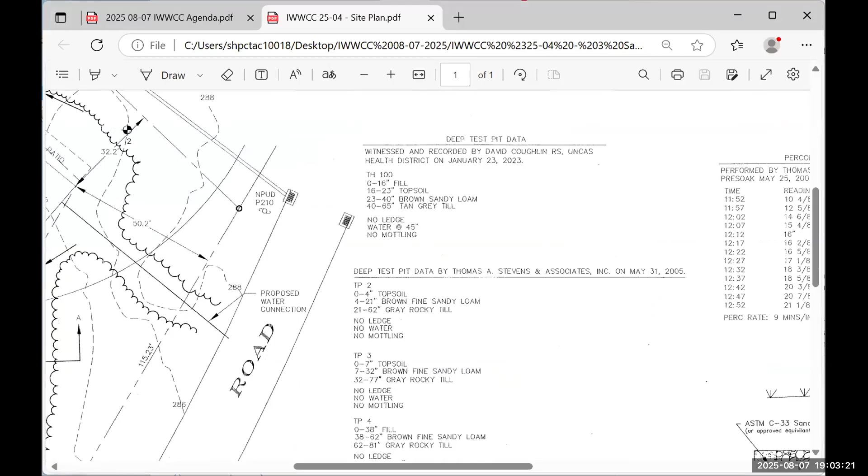Can you hear me now? Yes. Okay, sorry about that. I'm not real familiar with this, I'm just sitting in on the meeting in case there were any questions. I believe we have the site plan that we created meets all the requirements as far as the city and wetlands should be concerned, I hope. That was really it, I'm just sitting here in case there's anything anybody needs to hear.

How close are we? We're within 100 feet. So this line here is the Upland Review line. It covers the whole house, the driveway, most of the septic. Then this is the conservation area, restricted area. I don't know if you remember a few years ago, we had the house across the street, 2 Sabrina's Court, same kind of situation. They had that pond next to it and the wetlands are back here. So this is an approved lot from the subdivision, but it's been so long, they've got to come back for a new wetlands permit.

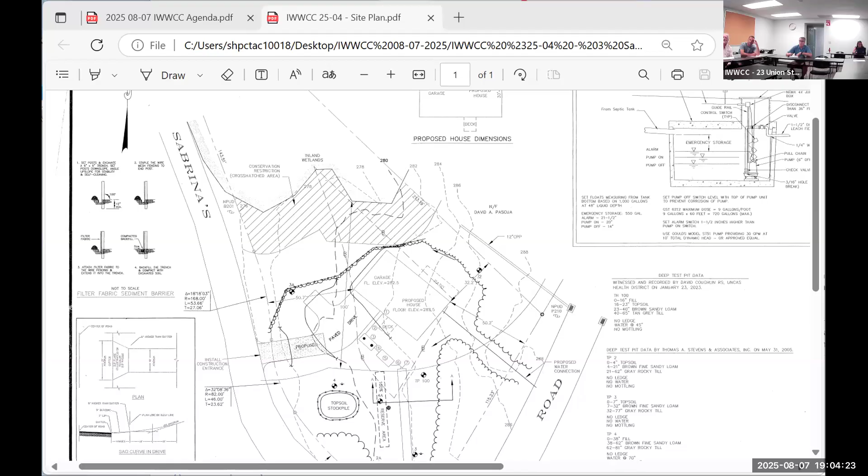Any comments from the city engineer? Minimal comments, I can go through that if you'd like. It talks about utility connections, putting in drains. It asked the E&S control, and this is in my memo too, be updated to reflect the newest guidelines, and to add wings to the silt fencing.

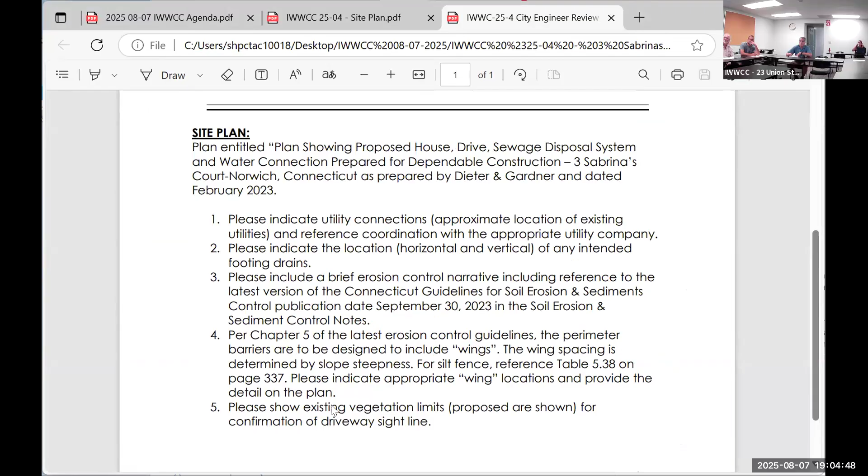And then I can go through my memo real quick. As I mentioned before, it was approved in '06. They do have their material stockpile location outside of the upland area. There's no anticipated long-term impacts to the wetlands. Home and the septic tank system are in the upland review.

Just note that after the presentation, you need to determine if a public hearing is necessary, and that would be for next month on September 4th. The only comments I got back were from the city engineer. I just asked that they be addressed on the revised plan set after tonight.

It's located in an area of moderate sensitivity for archaeological resources, so if they find anything on site, we just have a note in my memo here to contact city staff. I spoke to the city engineer about a bond, an E&S bond. It's $1,800.

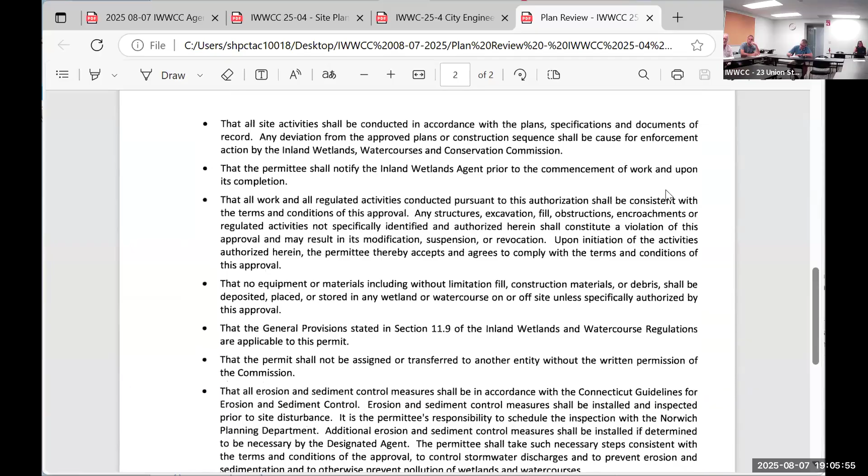I just asked to waive the reading of all my bullet points here, but they be included in any motion that may be made for approval. And as usual on the record, if you just state that the proposed E&S controls are sufficient to protect wetlands, if someone so chooses.

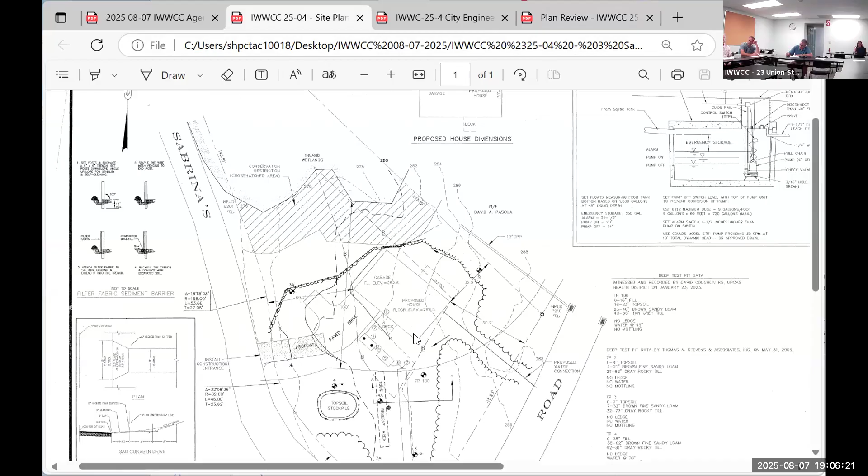And were there any other points that you want? Not really, it's just a typical house construction. They've got silt fencing, clearing limits. We're pretty good with it, really.

Any questions of staff? It's just hard to see. So the septic's in the front, right? Okay, there it is. Yep. And so the well would be, must be to the back of that. Excuse me, there's no well, it's gonna be city water. City water is gonna come in off Plain Hill Road. The water line goes right here, as far as that.

Okay, Dan, have you been on site? Yes. There's a lot of Russian olive in that conservation area. I know it has nothing to do with this permit, but I just wonder if you should have any concern with that at all.

From a wetland standpoint, no, but from a conservation standpoint -- well, that's part of your charge too, it is, part of our charge. So from a wetland standpoint, everything seems to be recognized. I personally wouldn't mind if during this construction, monitored by staff, some of the Russian olive and invasives were cleaned out of that conservation area. It's a sign of good faith, it would help the owners eventually.

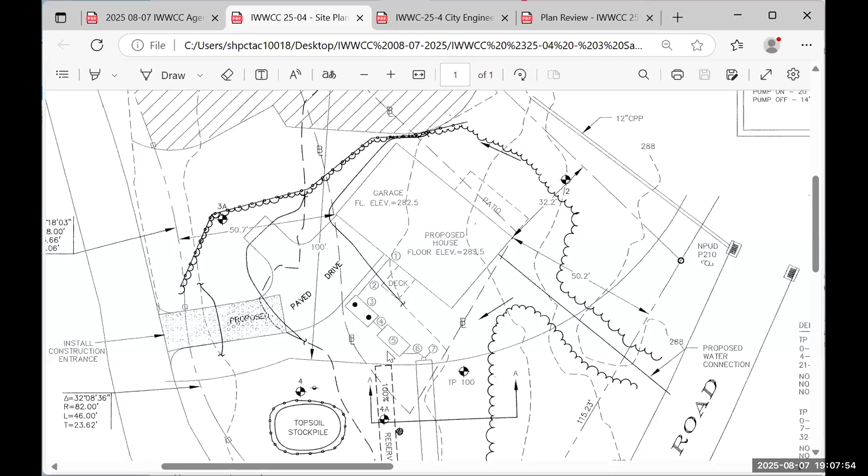I don't have a problem clearing out any invasives that are clearly visible and inside the scope of work area. I don't want to go too far into the conservation area, but I don't have a problem clearing out anything that is blatantly visible. I don't have a problem grubbing that all out. We'll work on staff with that. I just think it's a good opportunity.

During site construction, we'll provide them with the conservation signage that they have to post along that area. That'd be good. It's in conversation with other neighbors in that area, as houses change, they're not aware of the conservation.

Any other questions or comments? This is Chris, none at this time.

Okay, so is there a motion to determine whether or not this is a significant activity which would require a public hearing? This is Chris again. Yeah, I would move that this does not require a public hearing. Pete, second.

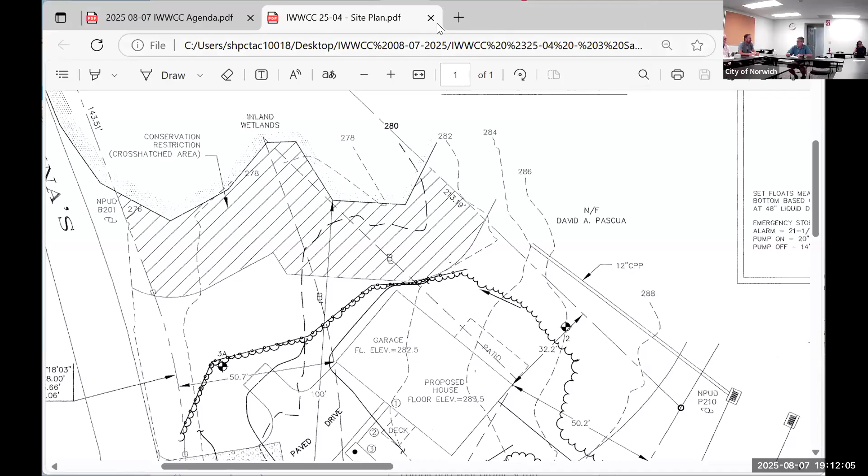Is there a second? Pete, second. All in favor? Chris, I. Pete, I. Annabelle, I. Dean, I. Brandon, I. Unanimous, so moved.

Next is IWWCC 25-06, 20 Lawler Lane. Yep, this is an application for construction of a new elementary school building and a development at the site of a current school. Proposed land disturbance activities within an upland review area. Application and property of the city of Norwich, assessors map 38, block 1, lot 72, zone R80. And we have people from the design team online to present.

Hello, good evening, can you hear me? Yes. Very good, my name is Jim Barrett, I'm principal with Drummey Rosane Anderson. Our offices are located at 205 Oakland Road, South Windsor, Connecticut. We are the architect and design team lead for the Moriarty Elementary School located at 20 Lawler Lane, Norwich, Connecticut.

The proposed school is located at the current Moriarty school site. It will be constructed while maintaining the existing school activities. When completed, the proposed new two-story, approximately 81,600 square foot school will serve approximately 550 grades pre-K to 5 students. We're pleased to share tonight's presentation focusing on the proposed land disturbance activities within the upland review area with the Inland Wetlands Watercourses and Conservation Commission, and our team's site and civil engineers will identify the key aspects of this work.

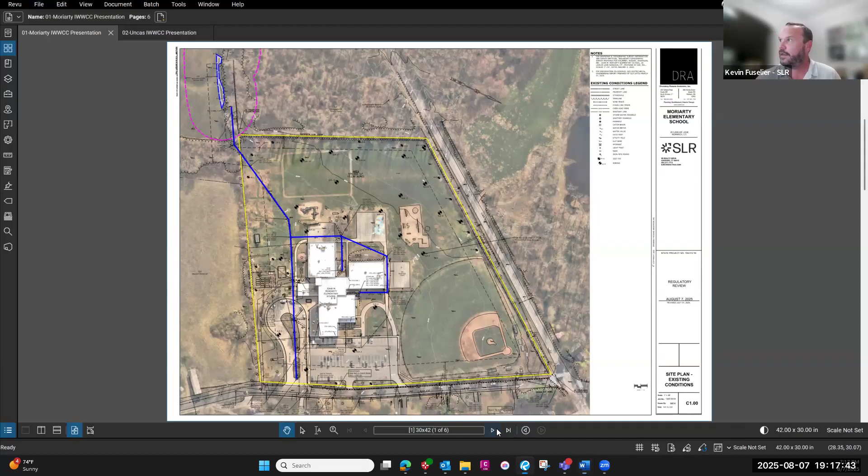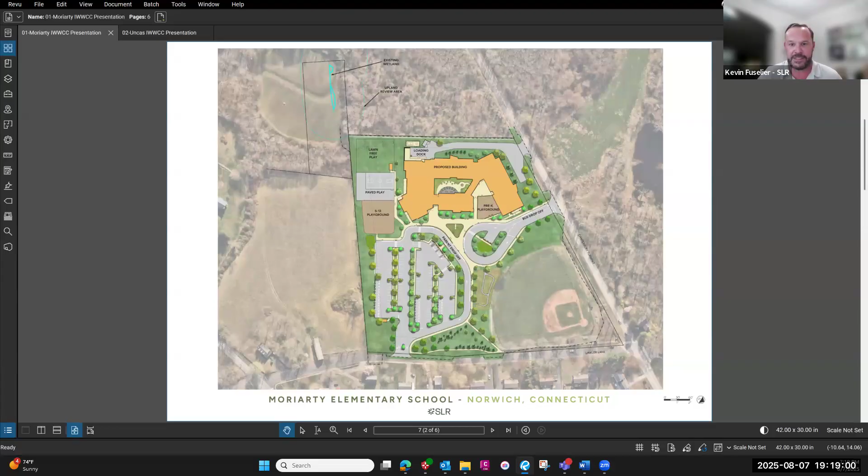And Kevin - again, we're here tonight because of this upland existing wetland and the activities proposed in the upland review area. I did want to note before I pass it along to our civil engineers, we received review memos from the city engineer. We've already been working on those comments with the city engineer and Dan Deniska to address everything, and we're certain that all the comments received will be addressed to the satisfaction of the city.

And Kevin, with that - can you zoom in on your screen because it's really small on the video board here? I apologize. If you want me to go back to the previous one, please let me know. If there's anywhere specific you want me to zoom in, just feel free to interrupt any one of us and I will be controlling what you see on the screen. Is that better? I'm pretty zoomed in now - I don't know what you're seeing exactly.

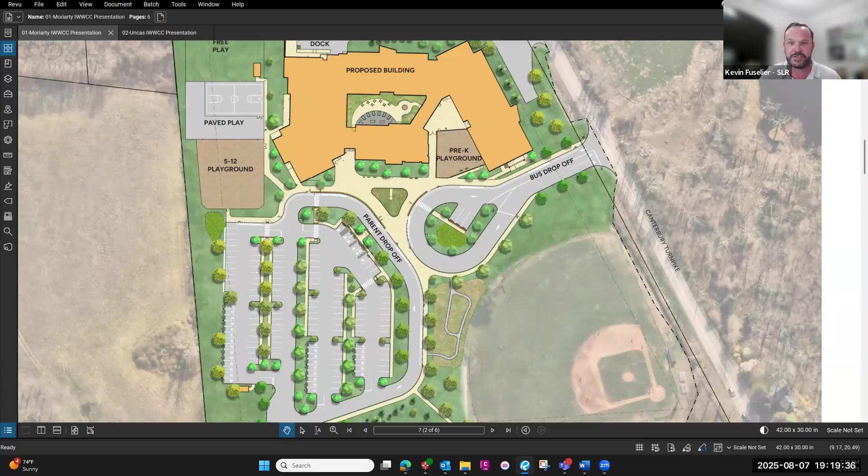Yes, thank you. So as mentioned, I'm going to pass this over to our civil engineers to review our storm drainage approach and sediment and erosion controls. I'll start here, but again, just tell me to zoom in when needed.

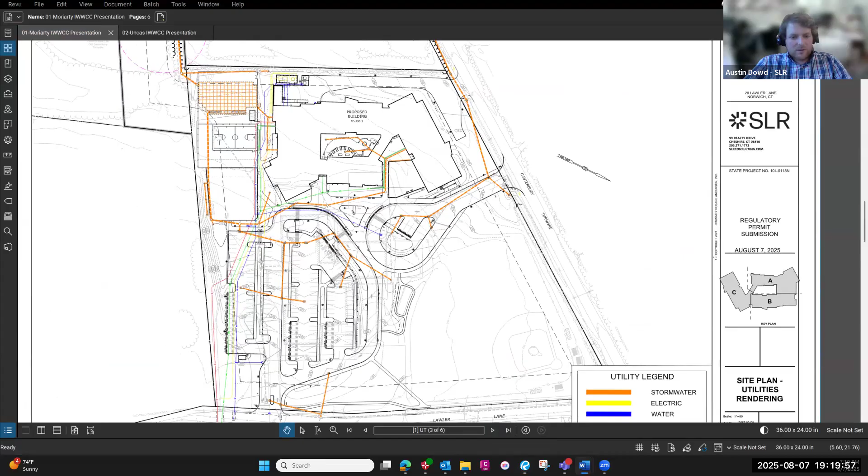Just for everybody's reference, you can see the utility legend down on the bottom right-hand corner. It's a little cut off, but orange is stormwater, blue is water, green is sanitary - just for your reference.

So we tried to maintain existing watersheds, as I discussed earlier - tried to maintain where the water is going now and keep it that way while reducing flows. So we are decreasing, or have no increase in, peak runoff rates for the 2, 10, 25, 50, and 100-year storms.

And we are accomplishing that via - Kevin, if you scroll up a little bit - the main way we are accomplishing that is this underground system. That is 132 chambers of retained concrete underground galleries, basically big concrete Lego blocks. That is how we are providing detention on the site and some water quality features.

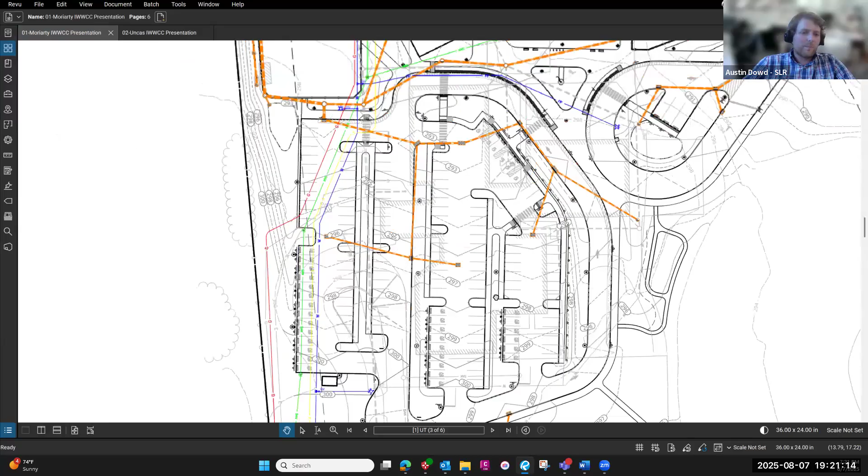That is what is doing most of the work on site. Besides that, we also have two rain gardens - one is in the bus loop, and another rain garden to the left near the 5 to 12-year-old playground, right at the base of that slope.

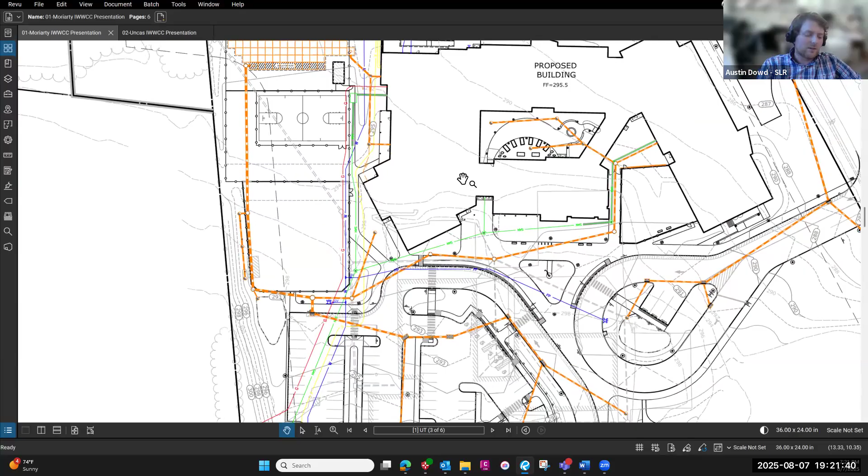Those are the main features of the stormwater design outside of the catch basin and necessary piping. We have a couple catch basins that connect to Lawler Lane for ease, but we are reducing flows to Lawler Lane, and showing storm drainage along the ditch or swale along Canterbury Turnpike, since we're adding two driveways to ease the long-term viability of that swale and provide a better solution.

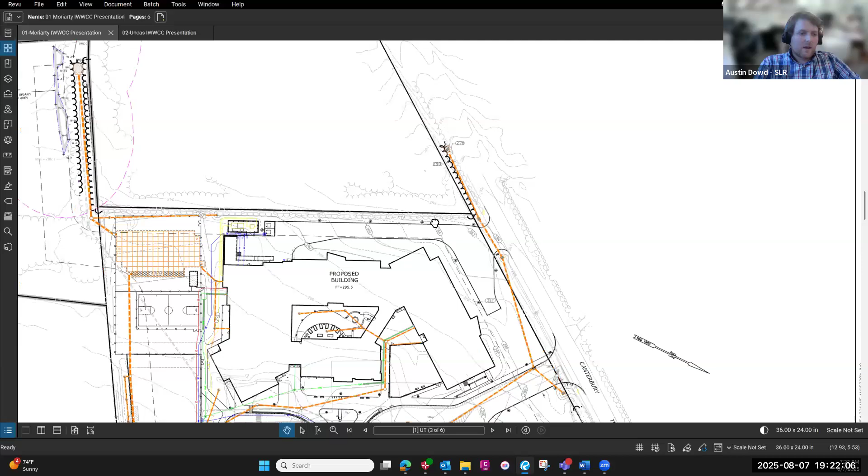The outlet for this underground system is right adjacent to the existing pipe and existing wetland. We are extending it a little further to pick up grade, so we can daylight the underground system. When we do this work, we will install the new pipe, remove the existing pipe, and it's a pretty tight window - we are not trying to do a lot of work adjacent to this wetland corridor.

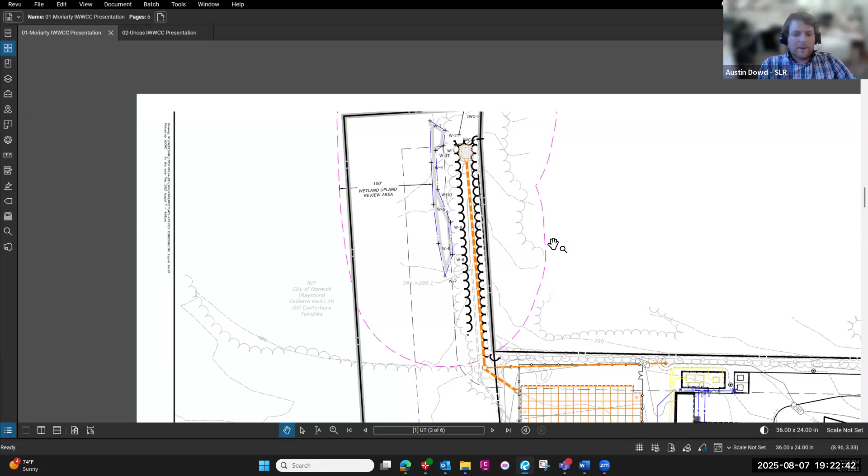Just to go over water quality, we will have a hydrodynamic separator on the gradient of the underground system, and we will have a water quality isolator row, a water filtration row in the underground to capture the first inch of runoff, which usually carries oils, sand, and grit.

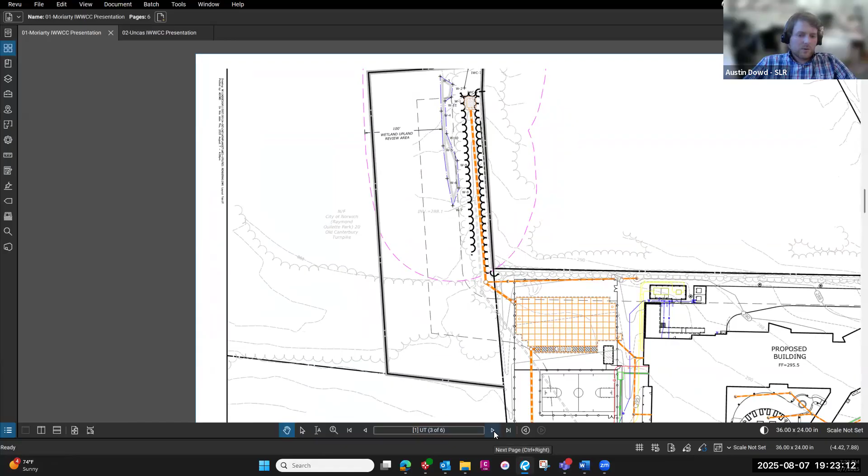All the other utilities are pretty straightforward - they all connect to the existing facilities out in Lawler Lane. One item Jim touched on earlier is that the two schools at one point will be standing next to each other, so the stormwater and all other utilities were designed with that interim phase in mind.

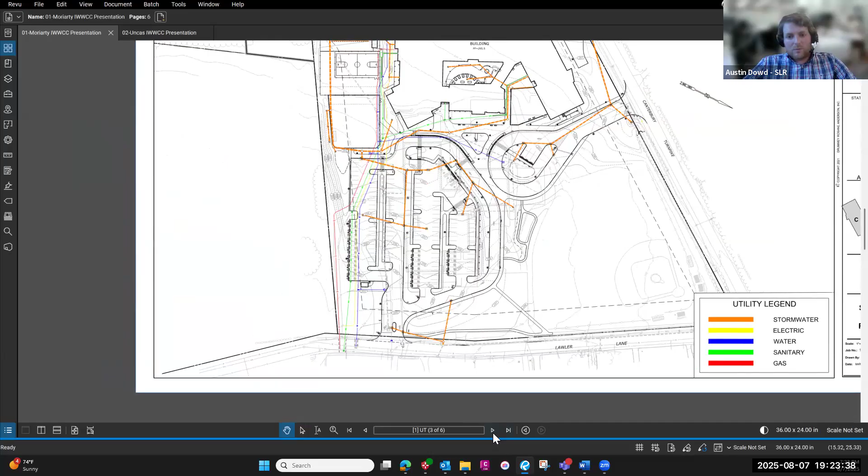We can jump over to the sediment erosion control plan. A couple more colors here - this meets the 2024 Connecticut guidelines for soil erosion and sediment control, along with city regulations.

It's really been designed to minimize construction impacts. We have a lot of standard S&E features like sediment traps, diversion berms, silt fence, hay bales, construction entrances, and inlet protection. The plan is for the activity within the upland review area to be minimal - it should be pretty quick.

We are installing the new pipe, removing the existing pipe, doing a touch of grading over the new pipe, and then stabilizing. We're also installing the riprap scour hole. It should be a pretty short duration construction activity in that portion of the site, and once it's stabilized, nobody should ideally go back.

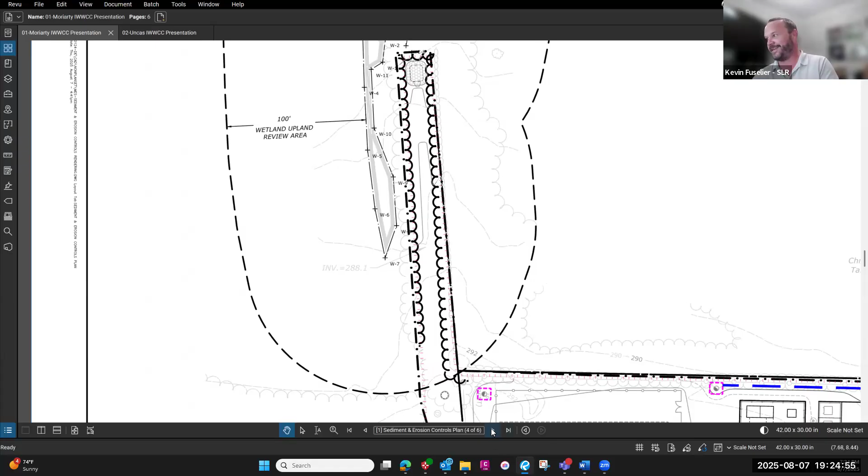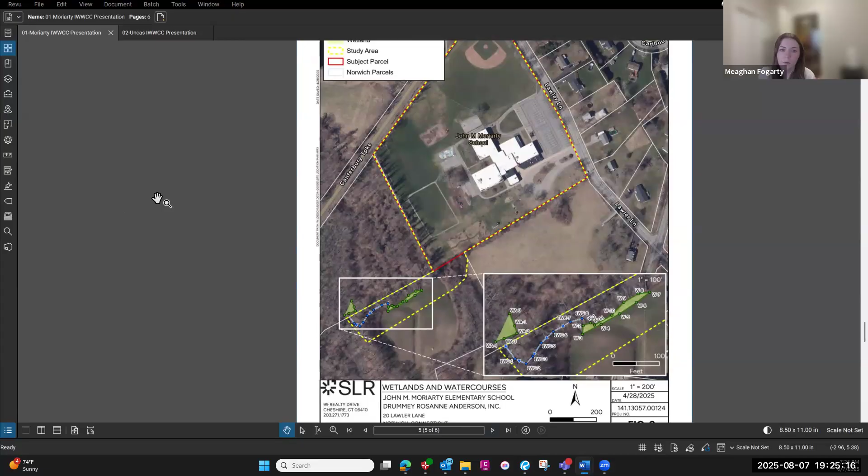Hello, Meaghan Fogarty with SLR. I'm a wetland professional in training, filling in tonight for Matt Sanford, professional wetland scientist and registered soil scientist. Matt and I were out here to delineate the wetlands. Initially, we were only looking at the school parcel, and we came back and said there were no wetlands.

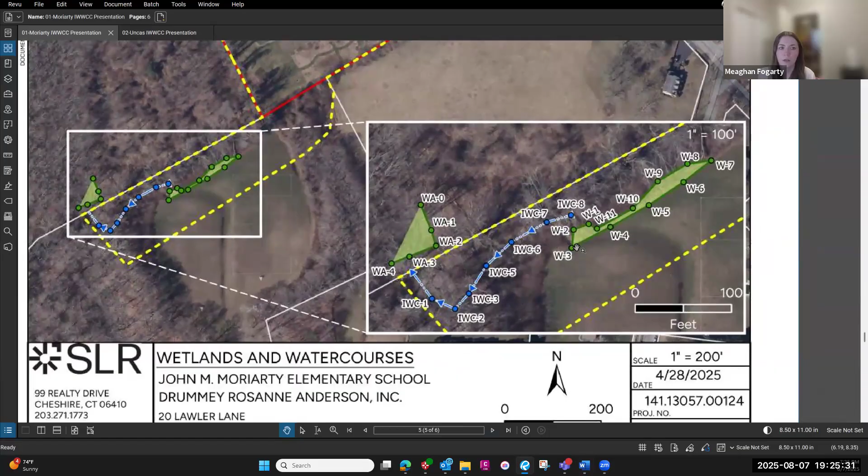Then we found out that we needed to discharge stormwater to the formerly city-owned parcel. So we extended our study area, as you can see in the yellow dash line, and came across that wetland and a little bit of intermittent water course leading away from it to the southwest.

As we already talked about, Austin touched on this - the only work occurring near the wetland is that pipe replacement. There's no direct wetland impact, no impact to the adjacent water course either, and we don't expect any impacts to hydrology downstream. As you can see, it does lead into a wetland fully offsite, and no impacts are anticipated.

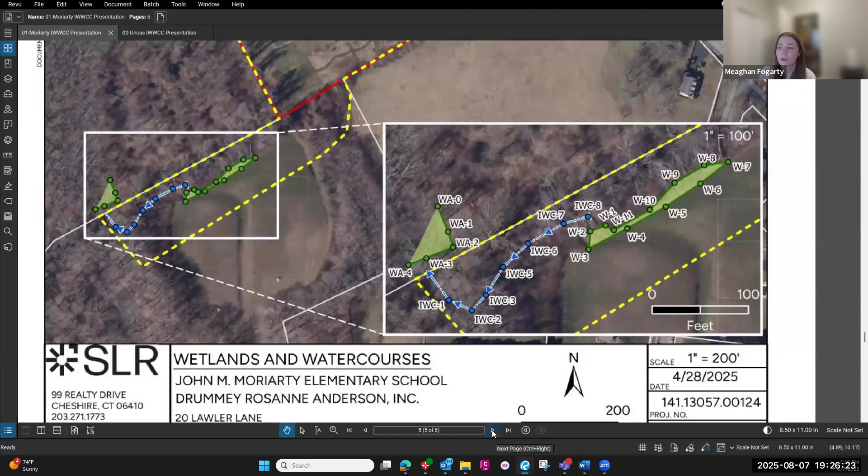I also just wanted to quickly touch on - before I do that, just for the record - the work within the upland review area is 6,210 square feet.

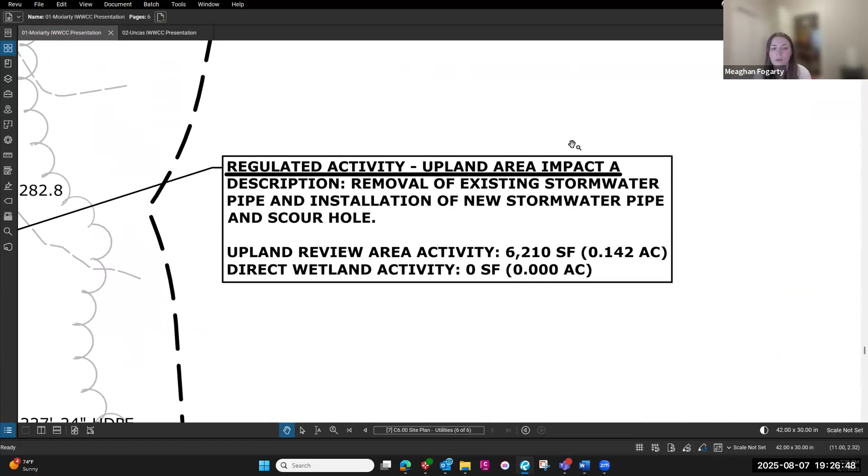As you can see there, the direct wetland activity is 0 square feet. But just to compensate for any minor unanticipated impacts, and to enhance the site's function and educational value, those rain gardens will be planted with native wetland vegetation that are pollinator friendly and provide that educational touch.

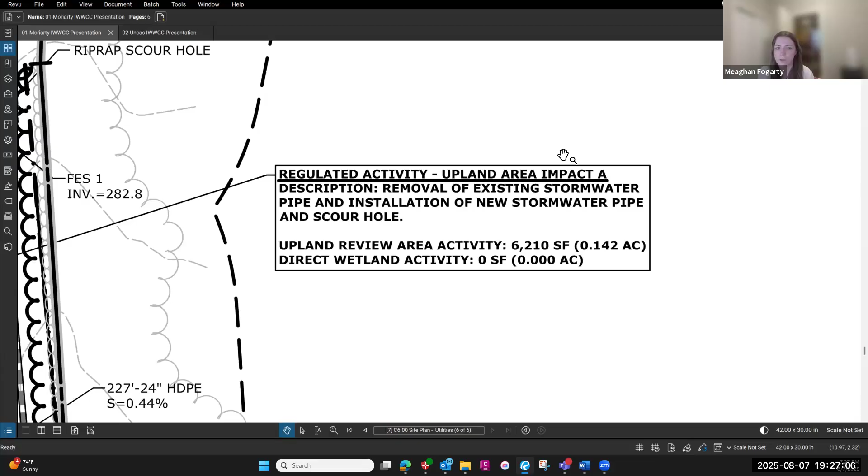There's a lot more detail in our soil report, but to keep it brief, I think that sums it up. So I'll turn it back over to Jim. Thank you. Well, thank you, Meaghan. That concludes our portion of the presentation. Certainly, we're happy to take any questions you may have for our team.

Just a question about the subgrade retention chambers. What are they rated for? Is that a 100-year storm without outlet? Yes, the outlet is designed for the 100-year storm and designed for all storms up to that.

And has there been any perc tests done on the soil in place? So we did do soil testing at the start of the design, and it came back kind of reasonable, but not great. There likely is not any infiltration capability of the soils. There was some mottling, some staining of the soil due to how high groundwater is, and there is groundwater on site.

In this area, this isn't a chamber system with crushed stone underneath it. It's simply a chamber area because of the water. Unfortunately, it just would start to fill up with groundwater, or have the potential to. Understand, thank you.

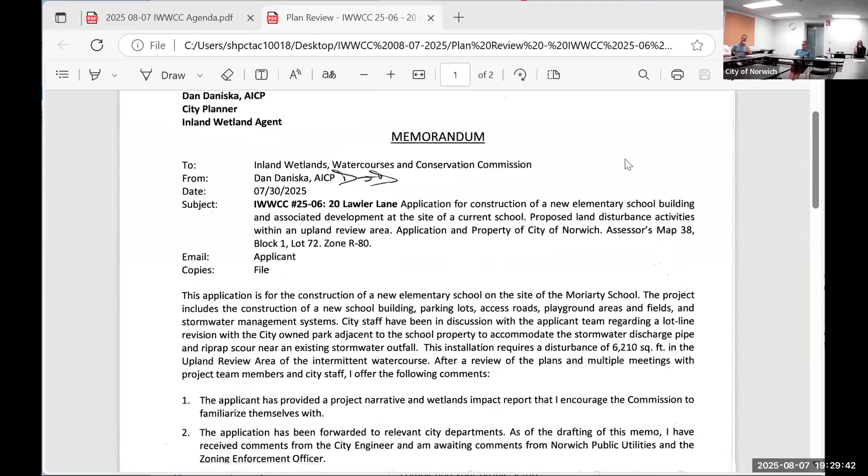Any further comments? Dan? Yep, we've been working with the team all along, so I don't really have a great deal of comments. We got comments back from the city engineer. As they mentioned, they've been working on some updates to the plan for that between wetlands and CCP approval.

They did talk about staging. The existing school has to be functioning while they're building it, so it's a delicate dance. And then I believe all my other comments have already been addressed or will be on the revised plan set. So I would just say, include my notes here for my memo.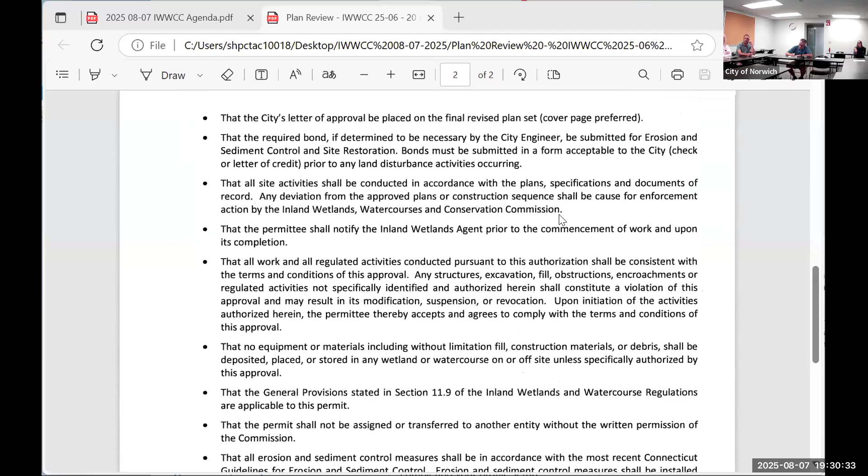I'd like to ask to waive the reading of that, and the proposed controls are sufficient to protect the wetlands on that portion of the site. Certainly, with their notes. Yeah, yeah.

You already determined when you received these, I think you already voted on not having a public hearing. Right, so there's no need to. Yeah, that's already taken care of. So, last meeting, a motion to approve or not approve IWWCC 25-06 with staff notes.

It's a motion on the table. Is there a second? Pete, for a second. Second. All in favor? Dean, aye. Chris, aye. Pete, aye. Rich, aye. Mr. Chairman. Unanimous, so approved.

Thank you, guys and lady. Oh no, they're here for the next hearing. Go. Yep, don't go anywhere yet. IWWCC 2507, 280 Elizabeth Street Extension. Same group.

Well, again, I'll kick off our team. Thank you again for your focus and attention with our first presentation. Once again, my name is Jim Barrett, Drummey Rosane Anderson, 205 Oakland Road, South Windsor. Again, we are the architect and design team lead for the Uncas Elementary School located at 280 Elizabeth Street Extension in Norwich. The proposed school is located, as was the Moriarty, at the current Uncas School site.

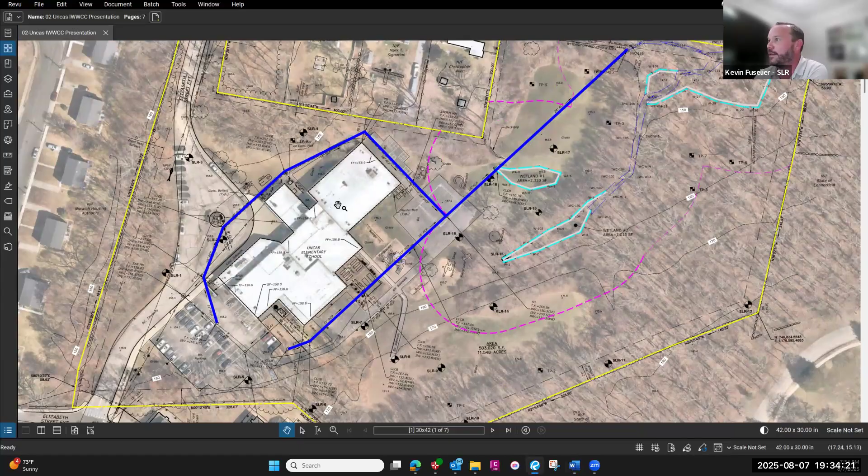Pretty much every other site feature out here will be demoed. The existing wetlands that were flagged on site are shown in turquoise, and their 100-foot upland review is in magenta. I'll let Austin speak to the existing storm drainage, which is shown in blue.

As Kevin mentioned, the existing storm drainage on site is in blue. It mainly captures the bus loop, main driveway, parking lot, and roof drainage, along with some drainage for the asphalt playground and other playgrounds to the rear of the school. They discharge to one of the intermittent watercourses on the plan, east in reality. There's no formal drainage or water quality features, retention, or any items like that on site—it's strictly catch basins and piping.

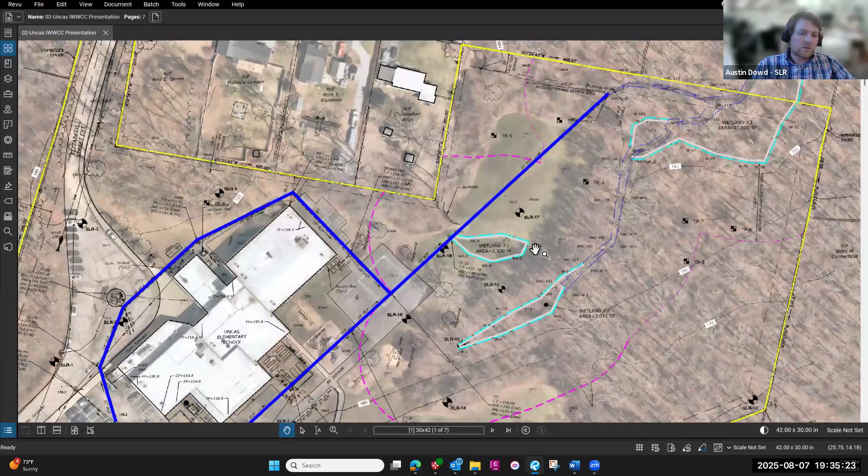The site generally slopes from the right side of the page to the left. The right side is at elevation 176, and it slopes down all the way to 152.

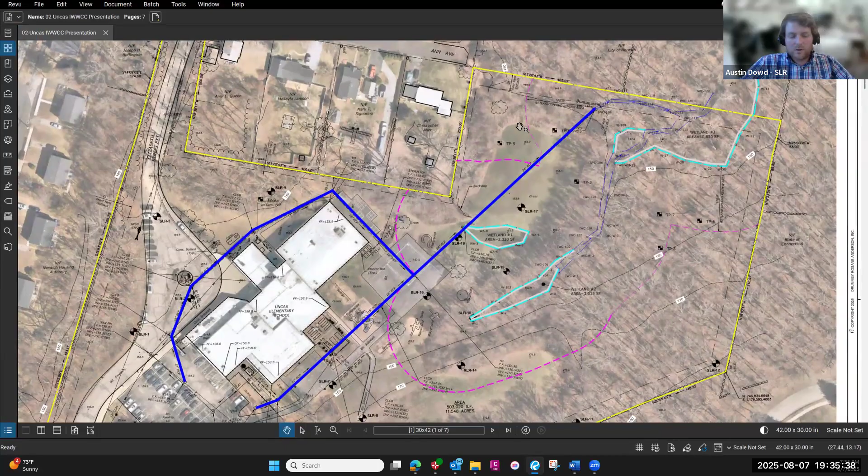A majority of the water is in one watershed. It slopes down from the bottom side of the page towards the school, hits a low spot, and goes towards the wetlands. There is one watershed near Allen Avenue to the north for the main driveway—some water goes that way, and that's a relatively small watershed where we're doing minor work. The third watershed is towards the main entrance and part of the parking lot and the wooded area to the left of the bus loop, which goes out towards Elizabeth Street extension and to the left.

For the existing utilities on site, sewer comes from Elizabeth Street and connects to the school. Gas comes from Allen Avenue, from plan north, and electric also comes from Elizabeth Street extension. There is the Norwich Public Utilities water main, which loops through the site—it connects from Elizabeth Street extension to Allen Avenue, and the existing school has a lateral off that.

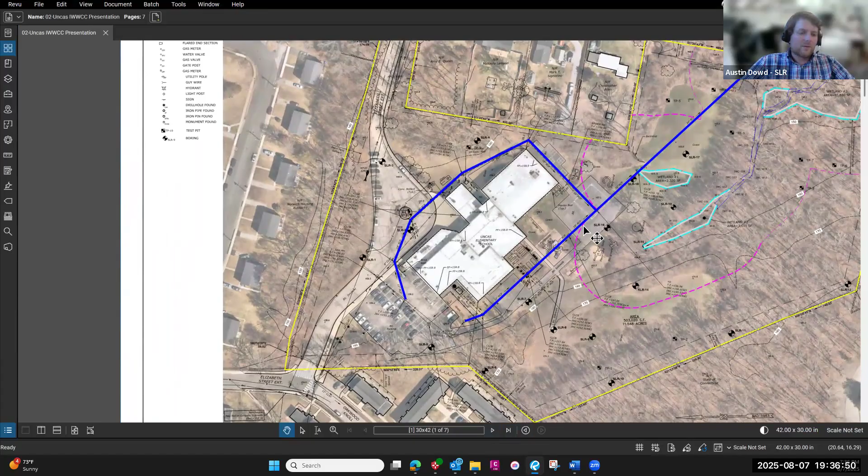I think that's all I have for existing.

So here's the proposed improvements, and in similar fashion to Moriarty, the new school building will be centralized on the site. There'll be new access drives and separate circulation areas for the buses and parent drop-off. The building will have accessible walkways throughout the exterior, new playgrounds similar in size and fashion to the previous ones we showed, and new stormwater features.

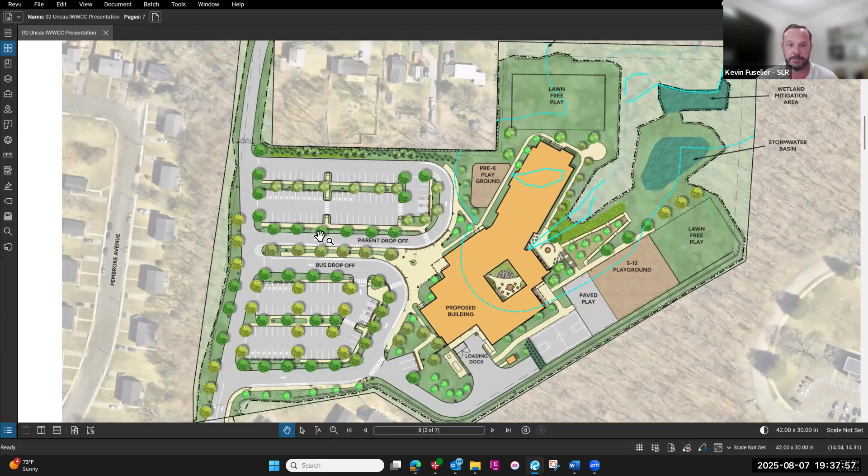Again, the reason we're here tonight is we have activities in the upland review, and with this one we do have direct wetland activities, which Megan will speak to shortly. In the same fashion as before, we've received review memos from the city engineer, and we've been working with him and Dan to address all comments. We're certain these comments will be addressed to the satisfaction of the city. I'll be going back to Austin now so he can discuss the new stormwater system.

As you will see, once again we color the different utilities in the same fashion. The critical one, of course, is stormwater in orange, water is blue, and sanitary is green. For this site, once again, there are no increases—we are matching or decreasing peak runoff rates for the 2 through 100-year storms, and we're trying to match existing watersheds as well.

As you can see, we have two main items of the stormwater system. That is the stormwater basin right there.

And then we once again have a retain-it underground system. The stormwater basin captures the upper portion of the site, behind the school to the rear, which is elevated compared to the front of the school. That captures some of the roof drainage from the building, along with these play fields and anything that comes off this slope off-site that drains onto the site.

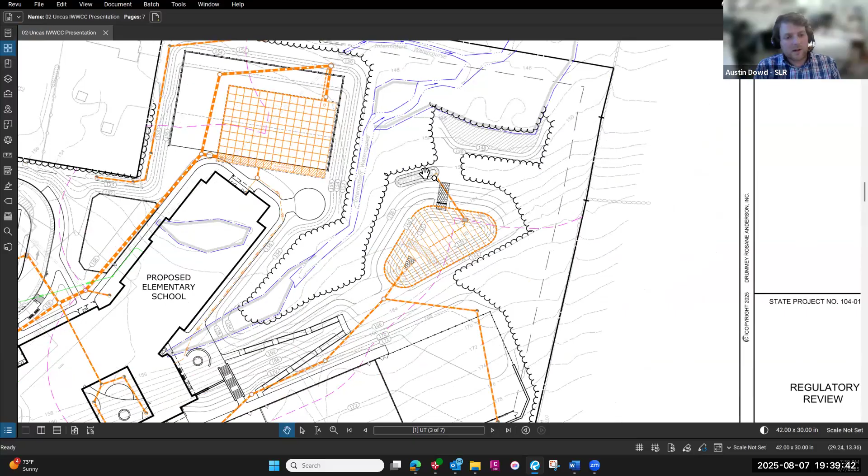This basin is approximately 5 feet deep. We have a stone berm to create a sediment forebay, and the main discharge of this basin is an outlet control structure, which will discharge to a riprap level spreader. The riprap level spreader has been designed to keep stormwater popping up and over the curb at less than 2 feet per second, which is the erosive velocity. So we're trying to maintain that when water does come out, it's coming out in a calm fashion.

The underground retain-it system is 140 units, and once again it has a similar feature of an isolator row, or water quality filtration row, for water quality purposes. This captures the remaining portion of the roof drainage for the building along with the front parking area. This really does a lot of work, and we are connecting to the existing 24-inch RCP on site. That RCP is basically the start of the intermittent watercourse right there, so we don't want to touch it. So we are using that existing flared end and a portion of that pipe, so that we are not touching it—it's staying in place.

For the water quality features on site, I talked about the water filtration row in the underground system. We also have, right up-gradient of that, a hydrodynamic separator, which should catch sediment, oil, trash, and items like that. The basin has also been designed to provide some water quality. The stormwater system, in terms of runoff rates and water quality, meets the Connecticut DEEP 2024 Stormwater Quality Manual. We are working, as Kevin said, with the city engineer on his comments and adjusting where needed, but we feel confident we should be able to stay within the footprint shown, and we shouldn't have an increase in upland review area activity. Based on his comments, we should be able to accommodate those.

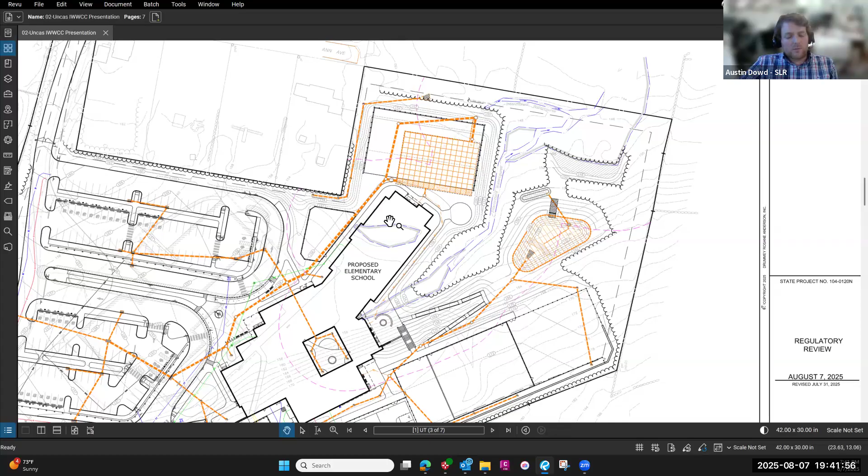If we jump over to the sediment and erosion control plan—it's colored just to make things pop a little easier. A lot of standard features here. For the stormwater basin, we are putting a sediment trap there, along with a sediment trap over our underground system. Our underground system won't be installed when that trap is there; that will come after, and it will adjust as the project adjusts.

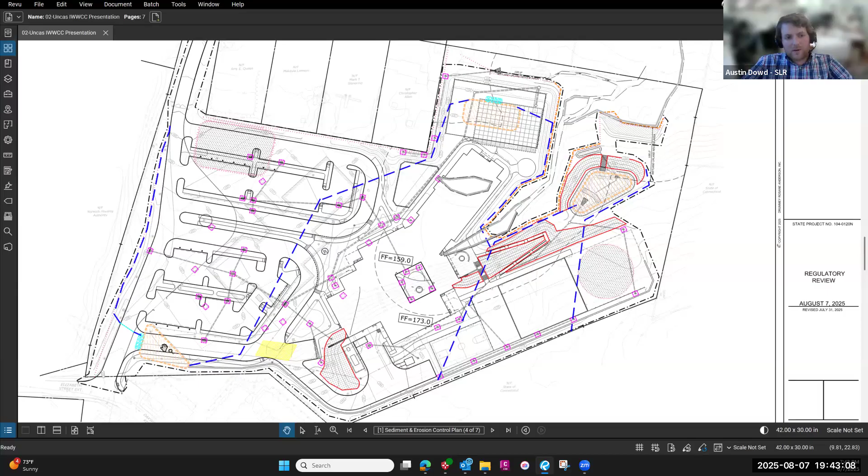As Jim and Kevin mentioned before, same as Moriarty, the new school will be constructed right behind the existing school, so the two schools will be operational at the same point. So the sediment and erosion control plan, along with the stormwater, have been designed to meet the different phases of the project—when both buildings are up, when the existing one is getting demoed, while the new school is fully operational. You will see a sediment trap near the main entrance. That trap won't be utilized the whole time; it will be for when the existing school is getting demolished and the new parking lot is being reshaped and reformed to how it is right now.

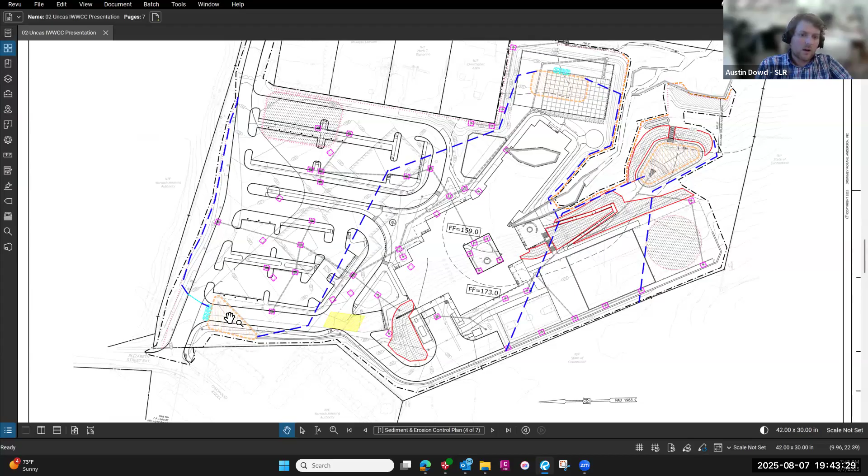A lot of standard features. We also have silt fence and hay bales right up-gradient of the eastern wetland corridor. Those are right along the limit of disturbance, to be our last line of defense and capture anything that these two traps don't catch. It will be massaged or moved throughout the construction phases on the sediment plan, but a lot of features on here will be there throughout construction and will be adjusted as construction goes, depending on impervious surfaces and how much sediment there is.

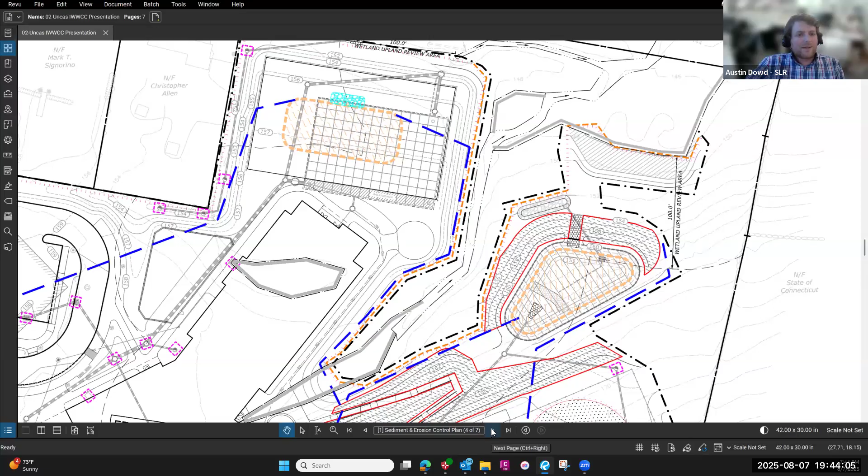There are some broad differences between the functions and values of these wetlands. Wetland A is in the middle of existing athletic fields and is consistently mowed and maintained as lawn. There's a catch basin at the northern end of it. It provides very little in terms of functions and values, more of a stormwater feature, possibly created unintentionally, and is very limited in terms of ecological value.

If you've already seen the plans, you'll know that is one of the areas impacted. But I'll move on to wetland B for now.

That is the upper portion of the larger wetland system on site. It was seemingly historically modified to grade the existing school. It appears ditched and channelized, made more linear to better convey water off the athletic fields to the east and west into this intermittent water course. As that transition happens, it becomes less disturbed, with fewer invasives and less anthropogenic debris, which is pretty common in wetland B—there are large poles with concrete on them, chip bags, and soda cans. So as you move downstream, it becomes more natural.

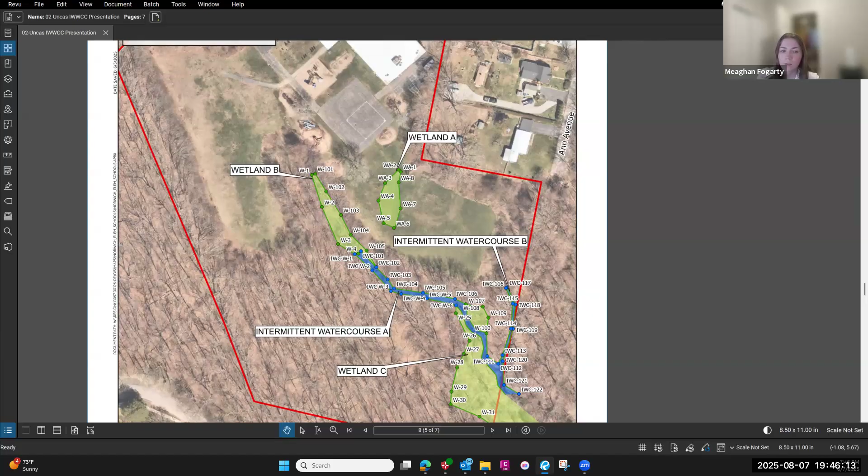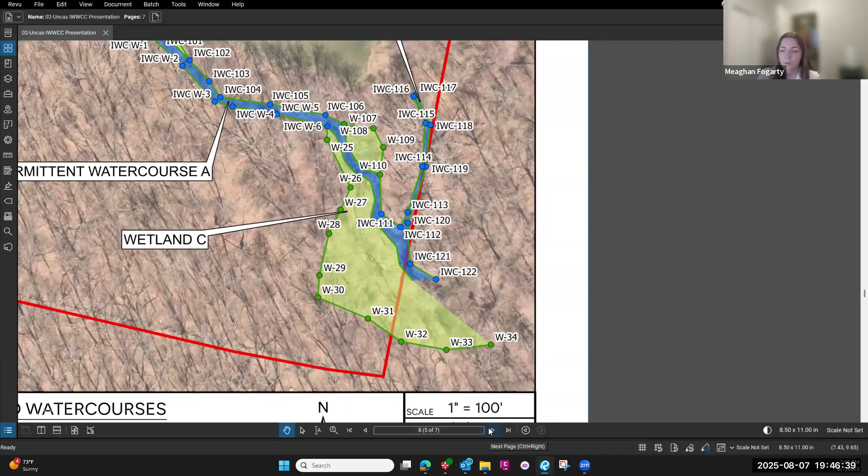Wetland C is the highest functioning wetland on the site. It's comprised predominantly of native wetland vegetation. If you look through our soil report, it has numerous functions and values that the others don't have. That became the priority in the design after this delineation—to preserve and enhance it to the greatest extent possible. So to move on to existing conditions, I think we have another image here.

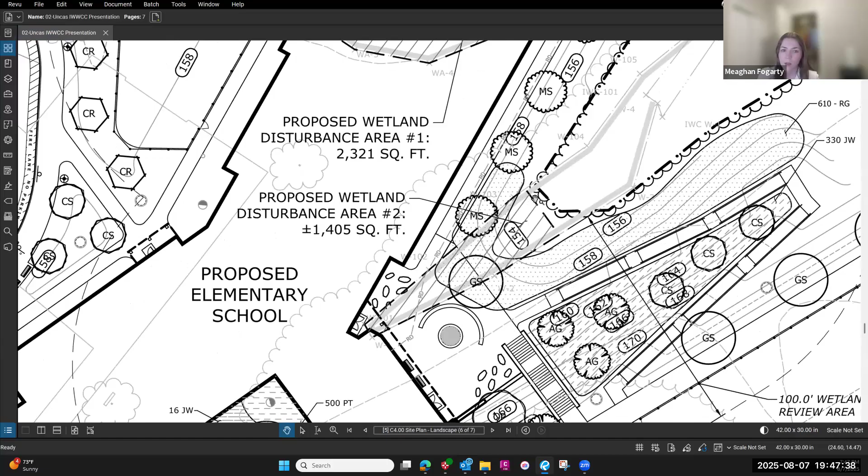As I alluded to, there is wetland impact on this site. It was unavoidable, especially while keeping the existing school online while this one is constructed. There are two impact areas: one being the entire wetland A, which is 2,321 square feet—again maintained as lawn, very little ecological function, actually no wetland plants at all, just grass and clover. The second area of disturbance will be filling the northwestern portion of wetland B, the upstreammost portion that is currently adjacent to the existing athletic field, which collects trash and debris and is pretty dominated by invasive vegetation.

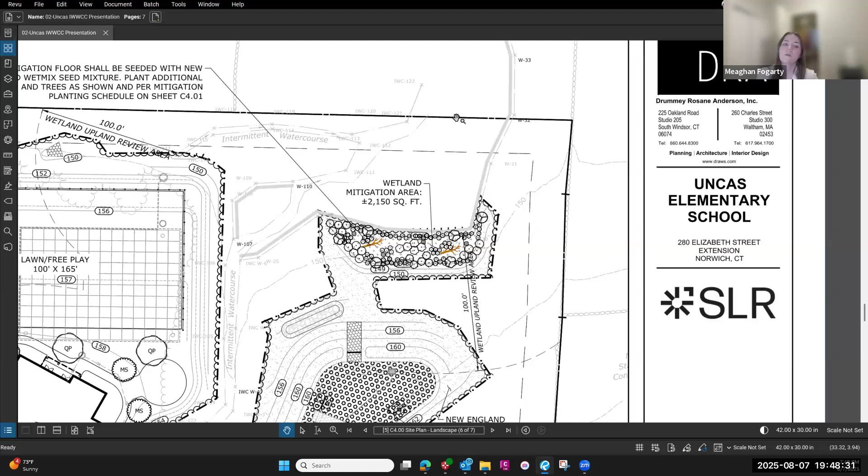That being said, it is a wetland impact, and we are responsible for compensating for that to the best of our ability. So on the right side of the screen here, we have a 2,150 square foot wetland mitigation area proposed, which will enhance wetland C, again the most ecologically valuable resource on site. There's an opportunity for enhancing it, and the mitigation area will be created through grading to intercept groundwater, topsoiling with screened topsoil, and planting and seeding with native wetland vegetation to eventually mimic and introduce new native species to wetland C, increasing its capacity to perform those functions and values that it already does.

With that being said, I think I will turn it back over to Jim. Thank you, and thanks to the commission for your time and attention. We're happy to answer any questions you may have for our team.

Thank you again, Meaghan. I just want to make a note, that was a challenging feat for you guys—I can see just by looking at that. And I think you've actually improved the quality of the wetlands, all said and done. So good job, we appreciate that.

Dean, any questions, any comments? Chris? No questions—again, great presentation. I know it might be the most challenging site since there actually is a wetland impact, but I think it's a good job in terms of mitigation and keeping everything good. Pete? Nope, it looks good to me.

Is there a motion to approve or disapprove? If I can just go through my memo real quick—yes, I would agree with all your comments. We've been working with the team all along. The city engineer has some comments; I have some pretty boilerplate comments here. I just ask that they be included in any motion for approval, and to waive the reading of it here. The proposed erosion and sediment controls are sufficient to protect the wetlands on site that are worthwhile.

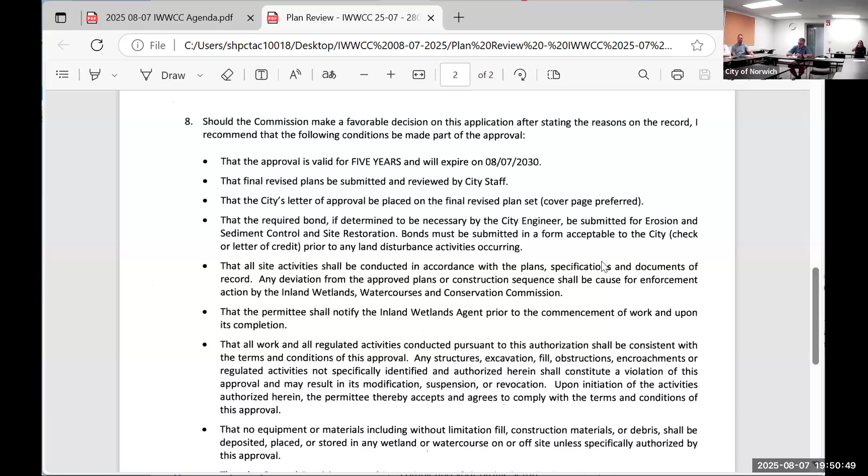Motion to approve IWWCC 25-07 with staff comments. Pete, second. There's a motion on the table. All in favor? Chris, aye. Annabelle, aye. Pete, aye. Dean, aye. Brandon, aye. Unanimous, so approved.